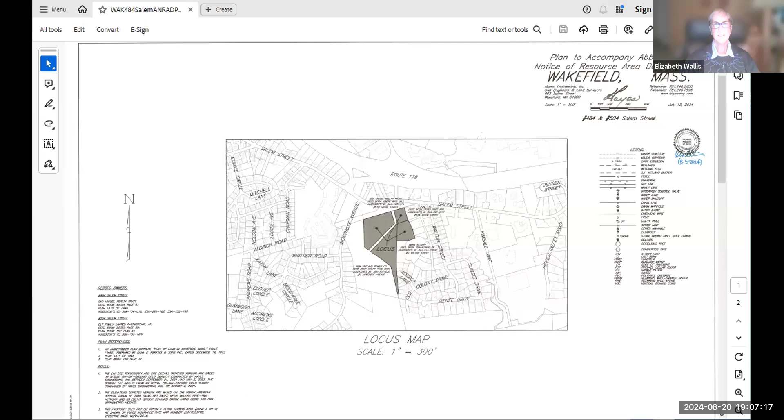And determine that there is no 100-year floodplain on the site. If I may, I can pull up my plan and give you an orientation tour. I think that would be a good idea. Okay, let's see if this works. All right, can everybody see that? Could you make it a little larger? Yep, I will. That's better.

All right, so our locus parcel is directly behind the Dunkin' Donuts at 518 Salem Street. You can see these 4 parcels here. We have 2 developed parcels, one at 484 Salem, and that's this sort of odd shaped one. And then we have this rectangular one, 504 Salem Street. Both have houses and other development on them. We also are including 2 vacant parcels, both noted on the assessors as 0 Salem Street.

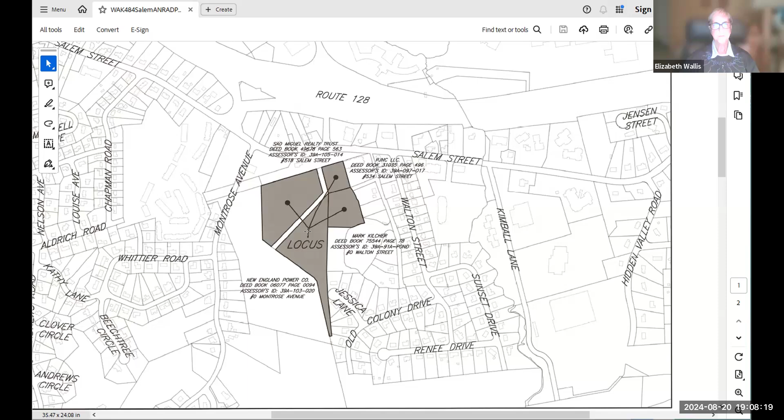As we move on to the actual parcel, so this is our parcel, and let me go out a little bit. So these are the 2 houses I was talking about, and this area over here and this parcel here are the ones known as 0 Salem Street. Getting back to the flags, we have 50 flags on the 2 sites. The 2 lots are combined for this purpose. And the wetland boundary is here in green color.

So you could see that it sort of goes around all the development. I have shown the 50-foot buffer zone in blue here. The entire locus is within the 100-foot buffer, so I chose just to do the 50. We are not within the 100-year floodplain. There are a variety of wetlands and wetland types on this property. We have forested wetlands between 484 and the Dunkin' Donuts fence. This is all wooded. It transitions into an open wetland marsh out here with phragmites along the boundary here. And in parts of the boundary in back of the 484 Salem house seems to be edge of fill. This area has been disturbed quite a bit. We transitioned back into forested wetland in back of these garages.

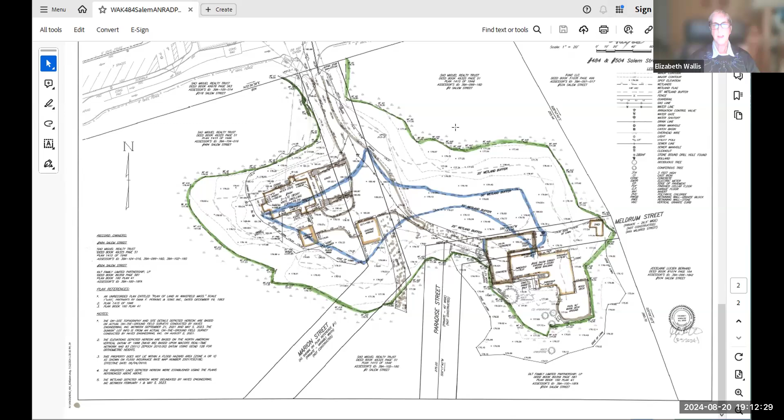We have a variety of grasses and sedges that have come up, so this is open marsh. This is actually a cattail marsh further back from 504. As we go to the right, this is an intermittent stream along the property line, so it's a forested wetland over here and forested wetland on this piece, 0 Salem Street. This area coming into the property is pretty well disturbed. Looks like it was at one time cleared and then regrew. You can see stumps and all.

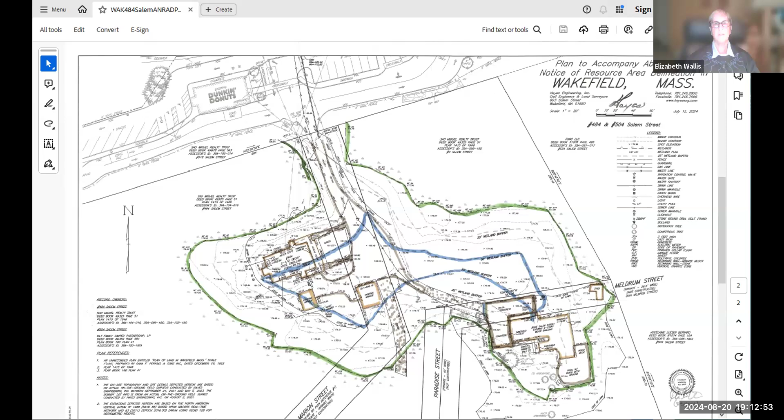Well, I think right off the bat we've got to go look at this. I've been down this road on other occasions. I think we've looked at this property before. My recollection is it's pretty wet out there, but I don't know where that line is in relation to the higher ground. I'm just going by memory.

I definitely think it needs a close look. I do think it's fairly flat, isn't it? There are actually areas where it's been filled and there's a bit of a slope transition, but yes, for the most part, in the back of these houses it's pretty flat.

Does anyone want to add anything to that? Because I'm just thinking there's not too much to talk about with this right now until we take a look at this. What is it that they're hoping to do here?

This is an abbreviated notice of resource area application, and what we're asking you to do is review our flags and hopefully approve them so that we establish that 100-foot buffer zone. We are also asking you to confirm for us that there is no 100-year floodplain.

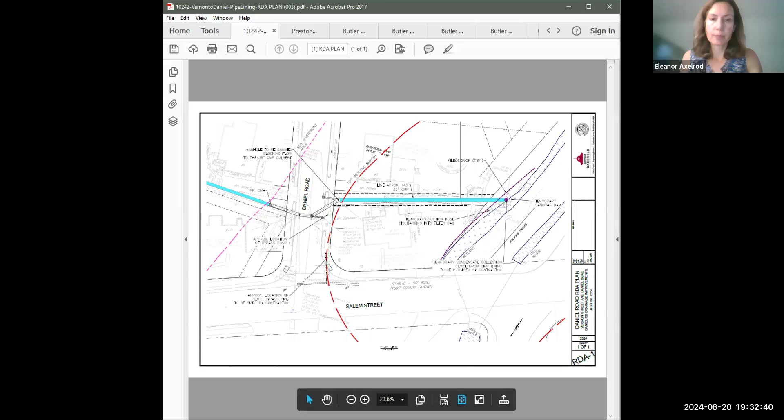Okay, so we need to move that - that would be a negative determination. Okay, I'll move that, need a second. Second. Okay, all in favor? Roll call for this.

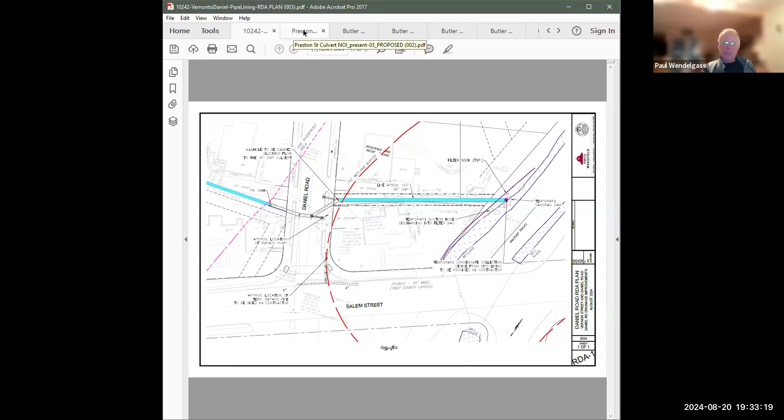Haley, yes. Paul, yes. Eleanor, yes. And I guess I'm a yes as well. Okay, alright, so that one's done.

One last question - when are you looking to start, Bill? We'll be bidding this, so I'm thinking this may end up being a late fall project. If not, it would be spring next year, somewhere in that time frame. But if there's any time restriction that you want us to work in, we're happy to do that.

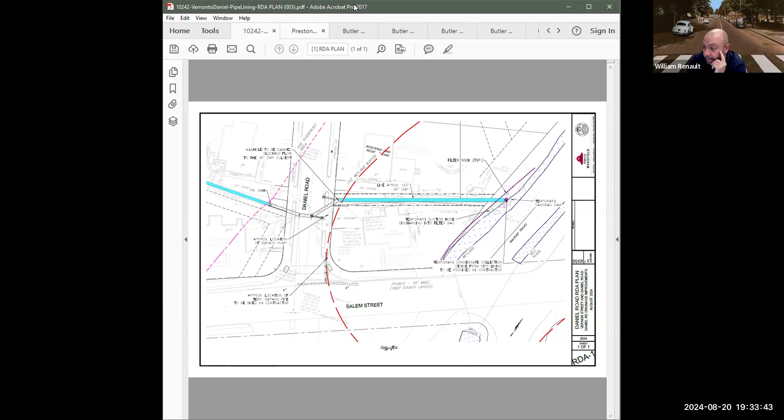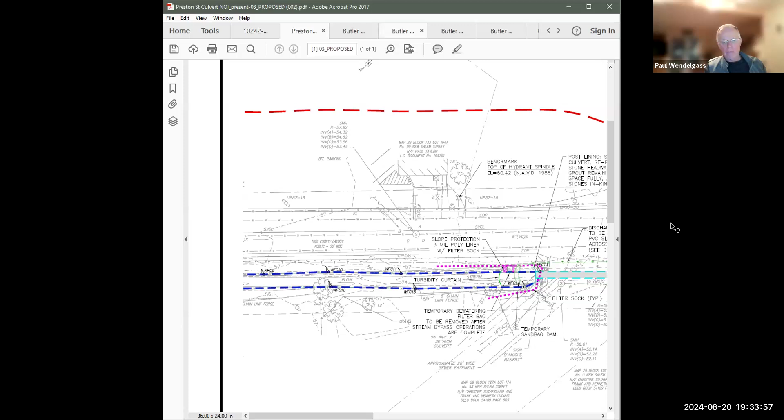All right, so the next one is Preston and New Salem Street. Let me jump in on that. You folks may recall, going back a few years - you can still see the screen, I hope, right? I just moved it on my computer, I wasn't sure if you could see it.

So downstream of this area is the New Salem Street culvert that you folks approved - I want to say that was around 2008 or 2009, right around that time frame. It did incorporate this Preston Street culvert. The original proposal was a slip line project through here, which would have reduced the opening significantly and grouted in, to have a much smaller pipe through this area.

We ended up with some issues needing ground supports installed for the larger culvert downstream. That was a budget constraint for me, so we weren't able to get this part of the job done. We bid it as an additive alternative, a separate part of the project that we can either award or not award.

So the project now is we're coming back in a similar situation. We've gone through and reevaluated the condition. We can clean and line this one as well, and it's something we'd like to move forward with. This is a little more involved. Besides coming here, we're also going to need an Army Corps of Engineers permit to do the work to bypass the stream.

Our proposal is to sandbag up the upstream side. We would install a pump system to bypass the stream down by the culvert and then discharge downstream of another sandbag system. On the interior, we would have to do some dewatering, which would be pumped as well. And we have basically a filter sock.

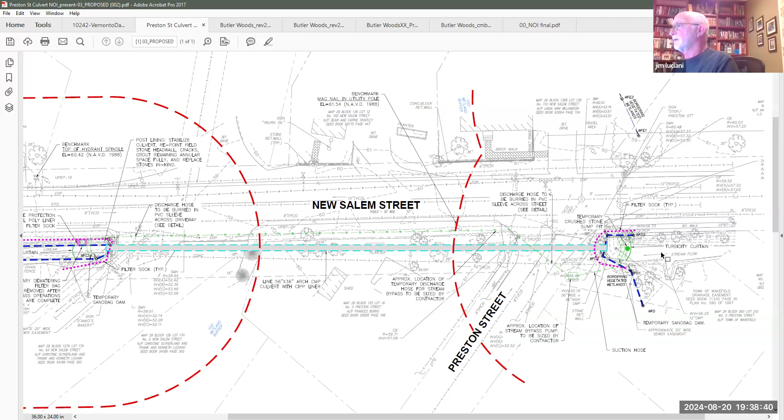If you look at what you put for direction of stream flow - the stream is flowing, and it seems like the labels show it going right to left toward each other, which is a little confusing. I think the labels are the problem. This stream is going this way, this little sign.

This is for the turbidity curtain downstream that we had put in, so the arrow is only pointing to the turbidity curtain, not the direction of flow. You can't see the arrow because the turbidity curtain label is over it, so it's a little confusing. I noted that as I was prepping for the meeting, so I didn't catch that when staff was designing it.

So the water is flowing right to left. Sorry, what is the turbidity curtain? It was included within the plan set.

It's what I'd call like a floating, almost like a pool noodle that sits on top. It's a curtain that flows and basically goes down to the stream bottom and is held there by a chain. So as we're discharging, between the cofferdam and the turbidity curtain it can collect anything stirring up that's not being picked up by the filter bag.

So we do that typically - anything we're doing in a stream, we'll always use a turbidity curtain. We use this same configuration within the previous permit that was approved, and on the downstream culvert as well. They work pretty well. It's kind of like a belt and suspenders, if you want to think of it that way.

My second question is, will this make drainage in that entire area run better than it does now? That area suffers from a lot of level topography and backup. Will this help? Yeah, it definitely does.

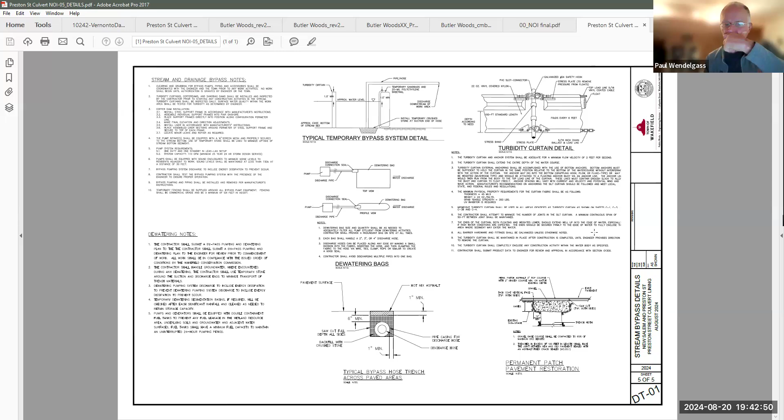Unfortunately, for us to fix the drainage out there, it is a situation where you would be dredging the river pretty much to the town line. So this is a situation where we have holes in the pipe and we need to make sure it doesn't collapse, so that's what we're doing here. It's more of a maintenance of the existing condition. We've opened up the pipe further down to get some additional flow through. That has happened, but how much of an appreciable flow that would be, that's a tough one to answer.

This was all identified as part of a town-wide study that was done prior to me being here, in 2006, and that advanced this whole project prior to me being here. So I kind of took this on as we had a staff member that left, and then it came into the engineering group to manage the construction and final design of everything. But all of the pre-work and design stuff was all done prior to me. So yeah, tough for me to answer that.

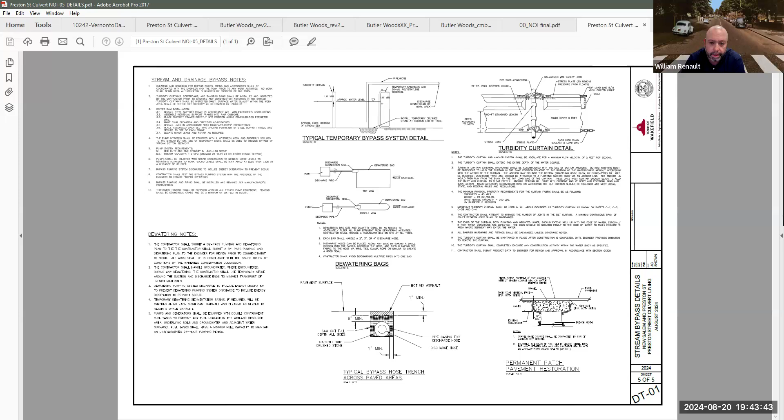So can you see the plan of the detail plan here? Yeah, I can. I have one question I want to ask you. Sure. As part of the project, can we have you clean some of the stream on the upstream side of the brook?

Clean out the brush that's obstructing the flow of water in that area, at least 50 feet in, unless you hit some real big stuff. If you want to condition it and the limits we can work out with Elaine, I'm happy to do that. Yeah, we could do that, because we should take the advantage of cleaning that area while we're in there.

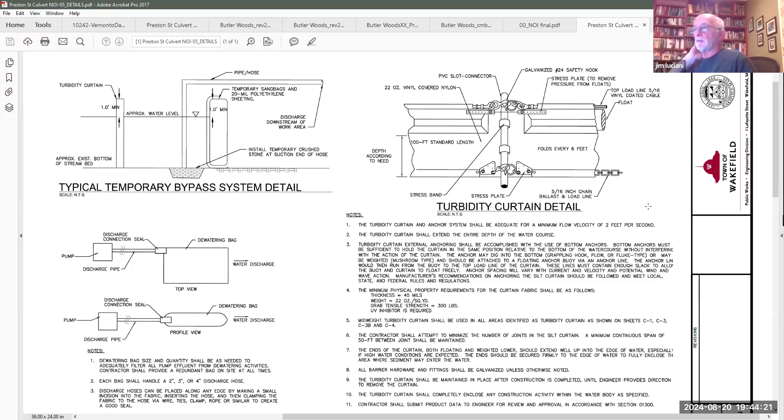I would think so. So this kind of shows how the turbidity curtain works. Each section of it is connected through a PVC slot. There's this little vinyl coated cable and float that sits to the top of it, and then you have these kind of chains to keep it together so the water can flow through. This is all kind of a mesh, so water's going through. Ideally, sediment is being trapped behind it. So if there's any turbidity being discharged outside of that filter bag, it would be caught here and not continue downstream and all the way down through the river. That's the idea why we do these.

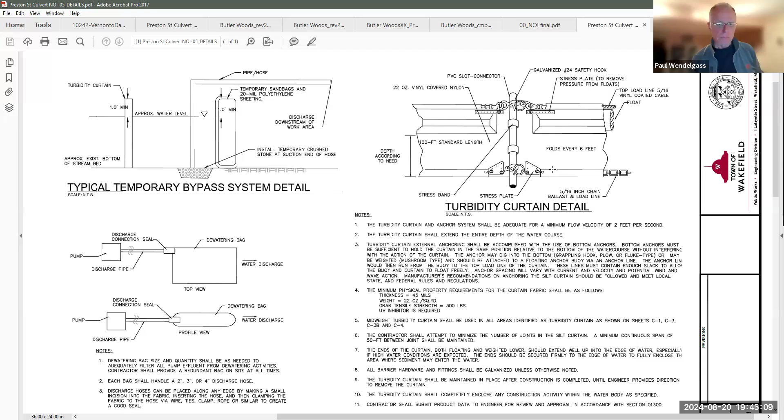And this was included in the original NOI with detail. So that's, and you see the chain on the bottom, that's what keeps it tight to the bottom so that it doesn't get bypassed.

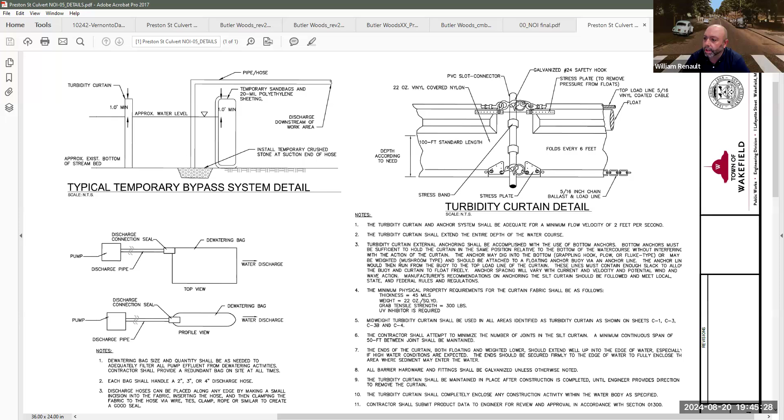So we did receive a few comments from the DEP. I don't know if you folks had a chance to look through that. I can run through those answers quick. I think I've probably covered most of them.

So the site plans are not adequate for review and should be revised. Well, I think we've just done a review, so I would disagree with that comment.

Wetland boundaries greater than 3 years old should be redelineated or refreshed. Elaine, I believe you went out there to take a look at this stuff too. Realistically, it's a pretty steep embankment that goes down, so you're not going to see wetland creep where it's going to go beyond over time. It's pretty much the river level, it doesn't really change from that.

So we were using the same flags from before. Obviously we just didn't finish the project, so we're just going to come up there to do this piece.

We should be showing bank delineation and that type of stuff. Those are essentially at the wetland flag. Elaine, if you want to chime in on that, but we've used this delineation for a couple of different projects. There was another one that was done where there was some discharge coming from across the street that kind of dovetailed and used some of our erosion controls. So I think we've looked at this area pretty extensively through different projects, but I'll leave that to Elaine.

Project narratives and plans should be provided to describe how wetland resource areas will be restored in kind. We just talked about that with some of the veg and stuff that we're going to be removing and cleaning up.

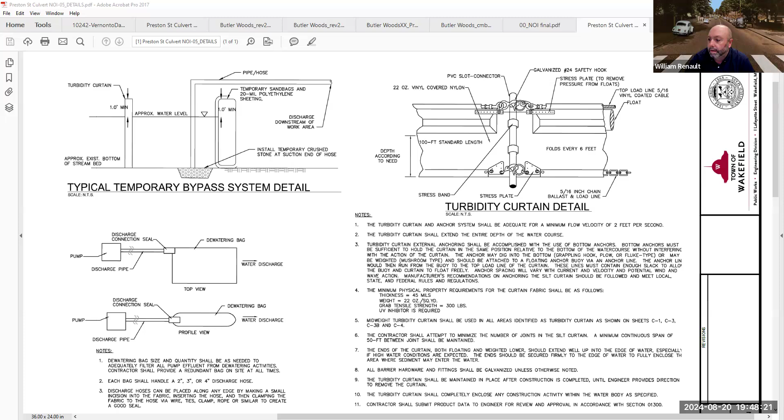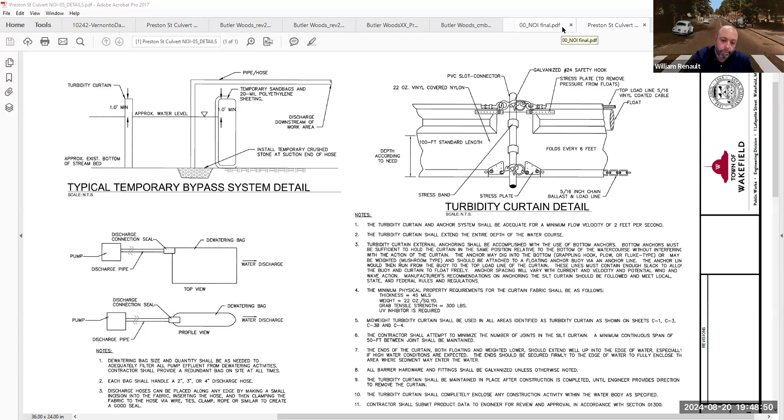This has a lining to it as well, yeah. So with the stream bed, it's a little bit different than the pipes we had before - I'm cleaning just a little bit of sediment in the bottom. When we get to these situations, obviously there's a lot more material that's there that gets moved from the stream, so we have a little bit more cleaning to do than typical. As we're pulling that material through the pipe, when it gets to the end, they're still working within that cofferdam dewatered area, and they remove that material and restore it back to the way it was previously. And again, if you want it to extend, then we extend.

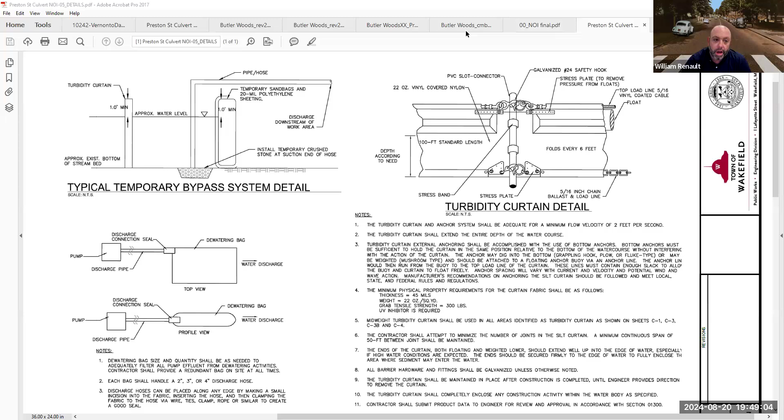You mentioned stream crossing standards, which you say you complied with. But we can't comply, it's just not possible. If you look at the way to meet the stream crossing standards for a run of this extent, this would need to be probably 4 times the width of Salem Street to meet your stream crossing standards because of the length of it. So it's just not practical based on the configuration of the site.

Okay, but what I was thinking about was, it says all culverts should be embedded, sunk into the stream, a minimum of 2 feet - in round pipe culverts, at least 25%. So, are you going to do the same thing?

You're gonna take the sediment out of the bottom to line it and then put the sediment back in? Now, putting the sediment back in this type of situation is pretty difficult because of the configuration. Smaller pipes, I wouldn't have a problem doing it, but I can't get folks in there to do it. So realistically, because it's a lining project, I don't have that ability. I'm typically happy to do those things, but in this case we're trying to save the town a ton of money by lining it, as opposed to going to town asking for a bond for $500,000 to replace this culvert. And keep in mind, I'd have to go through all this private property with the shed, the house, the fences, and all the stuff through here, wiping out a bunch of trees on top of the culvert too. So I'm just trying not to do all of that, to minimize how invasive it'll be.

Is this liner the same type of material as the other one? Yeah, it would be the same. I'm going to bid both of these together.

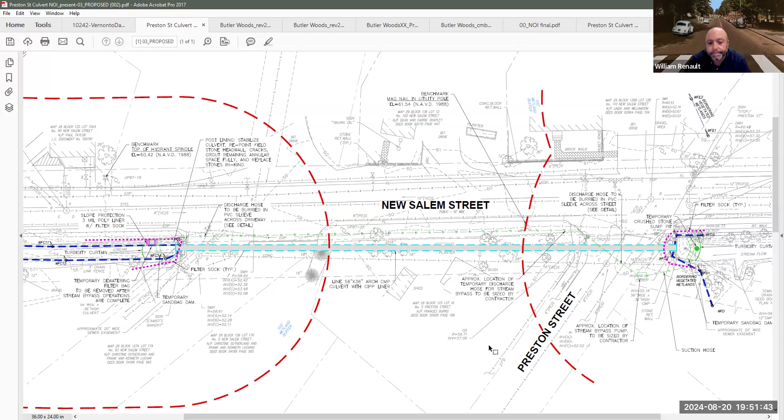Okay, next time Bill, if you could put down top of bank and bottom of bank - we should have that on these plans. It is a resource and should be identified. Yeah, I'm comfortable doing that going forward.

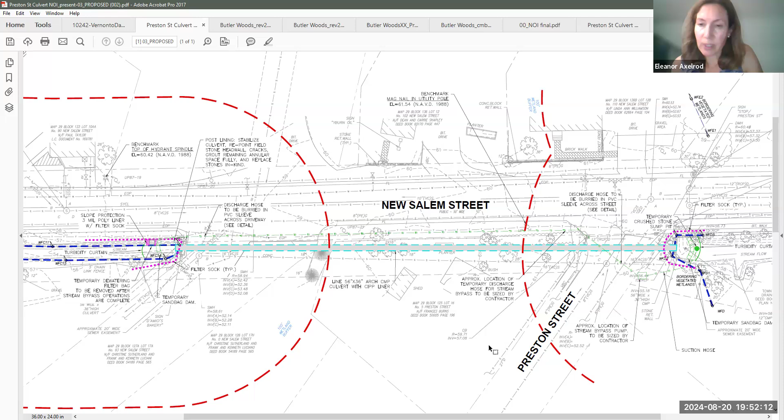Okay, if we want to do a site walk, I have no problem with that, if that's what the commission wants to do. You want to just do it the same day to make it easy, since it's down the street? It won't take long.

You're gonna bring some boots. Is there any water in the stream now? Oh yeah, so bring some boots because you have to get down to actually see inside. If you're gonna try to get down there, it's gonna be a challenge, it's pretty steep. Well, from the 93 side, New Salem Street, you might be able to have a better chance. I don't know what the other side looks like.

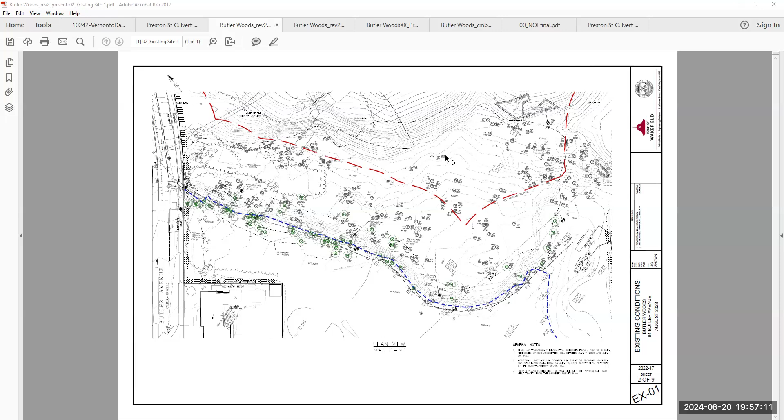So we've been talking with the DEP for a long time. That was probably one of the first things I did when I got here in 2008. As part of that first initial conversation, we talked to them about what we had to do in this area. Jim, I think you were with me at the time in that meeting at the Wilmington DEP office, where the DEP agreed that we could go and cap this rather than removing it, as long as we were to make this restricted for passive recreation.

So the proposal here would keep this area basically running right along that ledge line as a new passive recreation area. Going to our next plan, this kind of shows what we would be looking to do. We'd be looking to regrade the slopes at about a 2-to-1 slope that goes down to the wetland area. We'd be looking to put a new 18-inch cap on top of the whole entire site. Portions of this would be regraded so that we'd be able to get a gravel path that would go down.

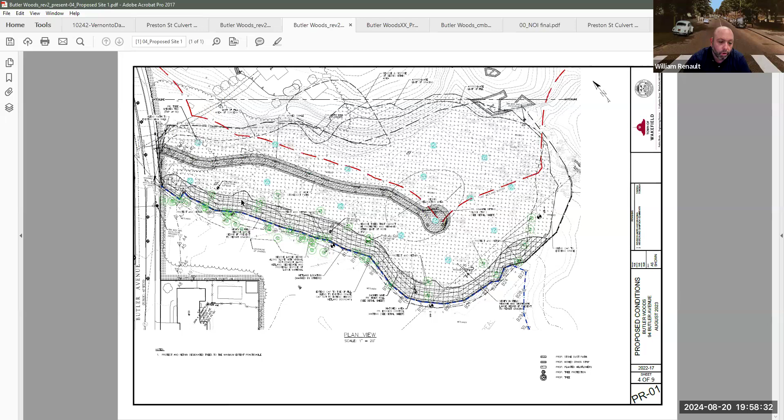So the gravel path comes down to a little sitting area here. We would have a few granite benches for folks. Our goal, after some of the site walks that I've had with Elaine and with Jimmy, is to look at trees that we can salvage.

So these trees, the green trees with the circles, are trees that we've identified as possible salvages. There's a couple that may be on the edge of the slope that we have to determine if the debris has impacted it too much or not. But this would be the area that we would try to save trees. The light cyan, this light blue color, would be new trees that we'd be planting within the cap as well. So we have a kind of specialized overlapping of the fabric and cap to make that work for the tree areas. We would propose to do that as replacement trees.

And then we would be looking for the majority of this to be seeded as a wildflower mix, so this would be more of a meadow type look through this area. That was something that Rebecca and I were talking about way back when we started initiating this project, discussing what we'd want to see out here for a final end product.

Looking at the topo and what we're looking for, kind of cuts, fills, and that type of thing - these red areas are areas we have to peel back. If you think about it, we have a 2-to-1 slope that's going right down to the wetland line. For us to cap that with 18 inches on top would impact the wetlands, and obviously we don't want to do that. So we need to peel back 18 inches of material so we can put the cap back on top of it.

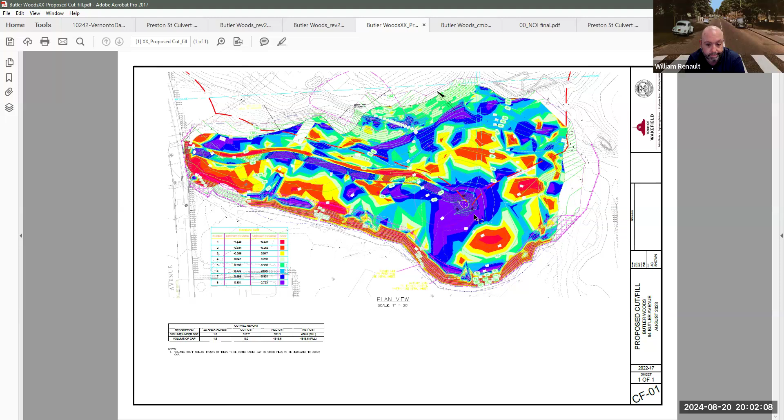So I think that's it in a nutshell. I know I'm going fast, but I think that covers it. Just to give you an idea of what the cap looks like, if I zip through here.

This shows a good example of what the slope looks like. You see you have the large debris coming through, and then we have these clumps of things, and it steepens up and does all of this. So what we're doing is peeling back debris, getting rid of these types of humps and things.

We're not touching any place past the silt fence that's there, so that would be edge of wetland and what we're using, and we're going to hold that as our limit of work.

Any trees that are down in this lower area—there's a couple of them where it flattens out behind it that we can salvage. We're going to salvage those to the best of our ability, as long as they're not damaged based on what was placed. Keep in mind, a lot of these were existing trees that would have been in the old wetland, and they've had debris basically thrown right on top of them.

Anybody that's in good shape, we identified those, and we would keep those trees, especially near the wetland area, to provide the shade over the wetland area.

We'd have some erosion control matting so that this stuff doesn't move on us. This shows the layout of our little path—stone dust walking path, pretty flat for the most part, so we're not expecting a lot of drainage issues. We'd have a little swale to the side of it for the hill coming down, so anything that's coming would get caught by the swale and gently overflow into the wetland as it does today.

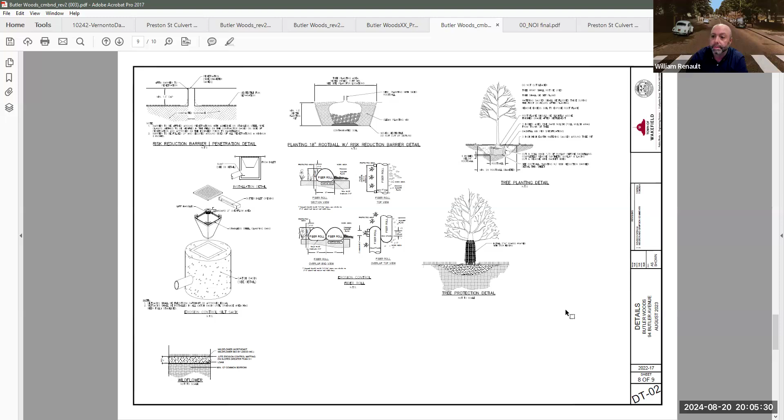And the wildflower mix you're talking about would be native? Yeah, New England wildflower mix, similar to what we used up at that hill. There's a native one we can use, and a few other ones that are even a little more prescriptive. I think the folks at Cabot and Forbes had a pretty aggressive mix blend. We're happy to have the mix blend reviewed by you folks too, to make sure everything's native, but it's all a Northeast wildflower mix. So that was the goal, to keep it all native.

Bill, with this system of capping, what is the final use of the property? What are we going to be able to do as far as that goes?

It's basically open space, and it would be in your folks' care. We'd have either a subdivision where I'd divide this as a separate lot, or I may do it as just a restriction — we're figuring that out. I'd like to work through that in this process to some degree.

The only thing is that some of the stuff on the top — to offset some of the cost for taxpayers and whatnot — we're looking at maybe a small affordable housing development type look. That's one of the things the council has been asking me to evaluate.

As the ADA coordinator for the town, I talk a lot with the Disability Commission, and they'd like to see some disability housing there too. So we're trying to meld those two asks into a pretty small development — thinking small cottage type things closer to the neighborhood, not like a garden style apartment. That's not what we're looking at.

So that's all outside of the buffer zone and outside of this project. Well, so I guess I'm back to where you're putting this cap — what kind of use does that entitle you to? Like, if you're going to put houses up there, are kids going to be coming down there trying to play?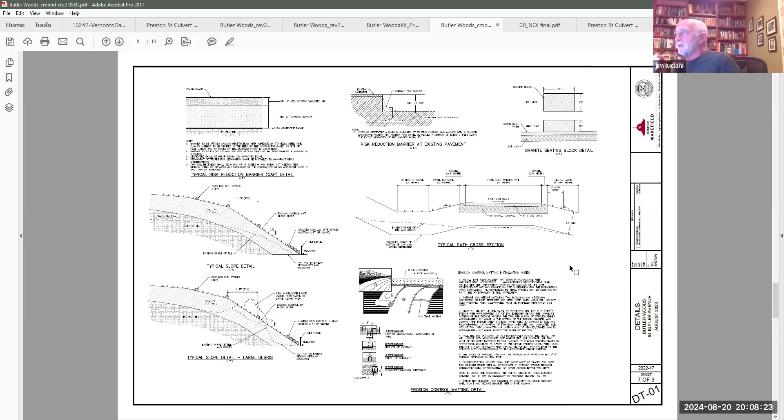So I know your part will be fine. I think it's just human nature to gravitate to areas like that. Well, I think all that stuff is in the restriction too, right?

So as we're writing the restriction and finalize that, we would have all that detailed out, that it has to stay as passive, this stays as a meadow, a wildlife corridor, whatever you want to call it. So it's there and it's in the documents for the property and it can't be changed.

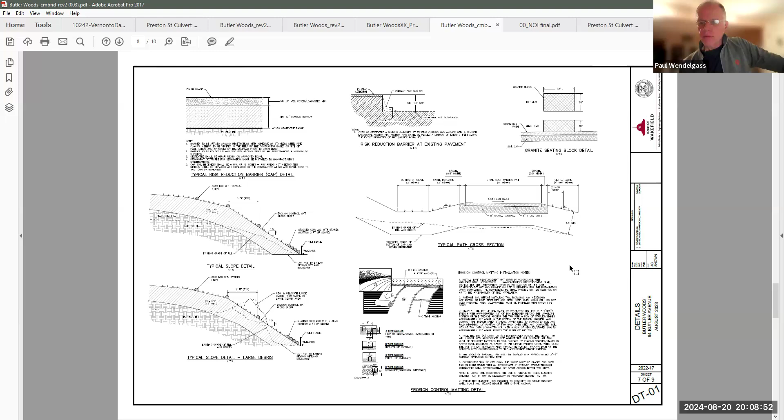So it won't be mowed, Bill, is that correct? The intent is not to mow. Similar to what we do at the hill, we're not really mowing those down. I mean, they're perennials, so they should be coming back. It's just making sure that the junky stuff that's getting in there is weeded out, so the natural stuff can take over, and then the natural stuff will stop everything else from coming in. So there's a maintenance component to it, no doubt.

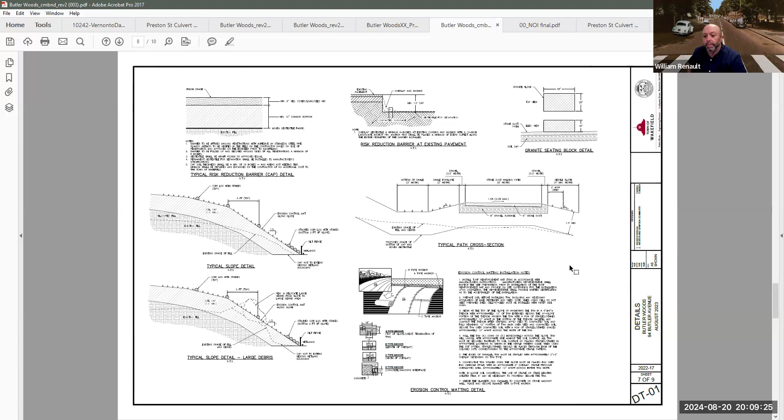We're thinking we can get it done through 3 seasons. That's typically what we would condition here anyway - we typically look at a 3-year horizon for the maintenance of those types of things. So we would do that same approach here.

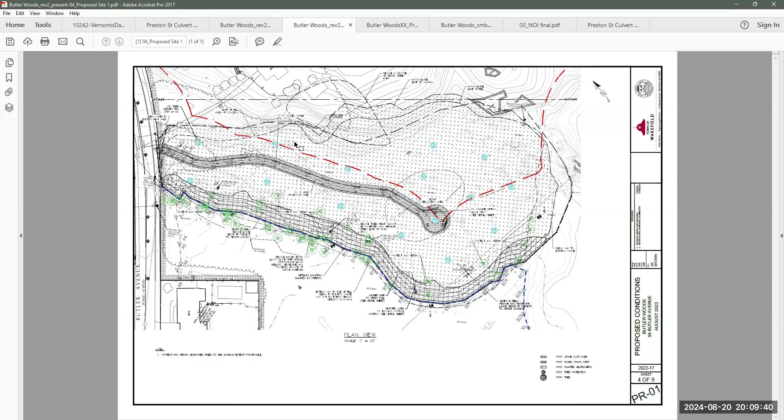Can we go back to the other map for a second? Can you point kind of in relation to what we're talking about where you're saying this possible development would be? So see the house up the top here? It's up on the top of this hill, so it's kind of up in this area.

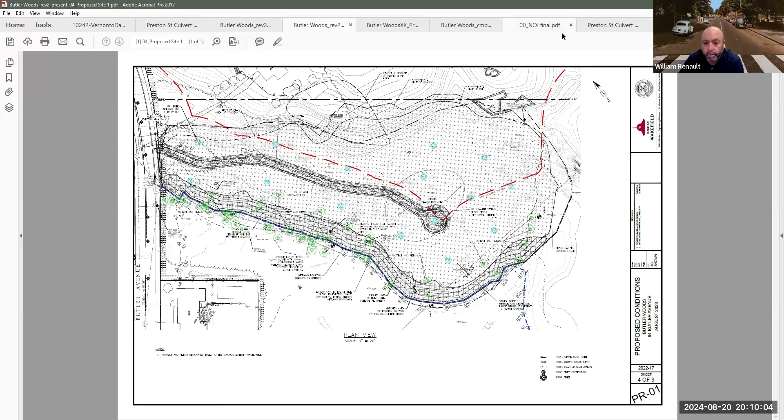So I'm thinking somewhere the line in the - I gave you a plan that showed kind of a proposed line in the initial NOI filing with you. That shows what I would expect that to look like. I can probably find that quickly if you want me to show you what I was thinking. So this is kind of a shot of the debris that we were talking about, and I just put the back here, what we were thinking.

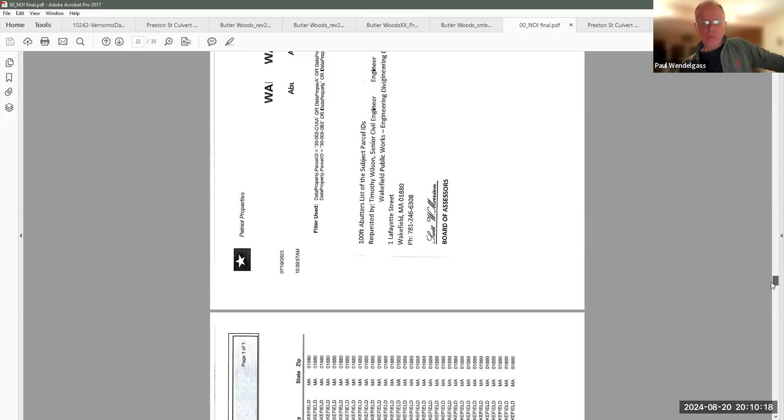What's the name here? Tim, do you remember where you put that, from like 4 years ago or 2 years ago when you did that map for the subdivision? Not the subdivision, but at least like what would be the restriction area? If you go to the revised NOI plans, I do have one of the plans that does show the top of the hill. No, but we included a map that showed... let me look real quick, I'm looking for it, Tim. But we showed kind of what we thought would be the restriction area.

Essentially, what I'm doing is kind of going through the middle of the ledge area for the location. If you want me to share my screen, I can show you that map. You get it? All right, yeah, let me stop sharing. Your turn, you're on.

Yeah, so here we go, this is the thought. So the parcel, this gives you the overall parcel, development area, probably somewhere in this. We have a big gully that goes through. There's some other wetlands in the back that would come in as a separate filing in the future. And we're thinking this whole section would be either conservation restriction area or subdivision in a lot.

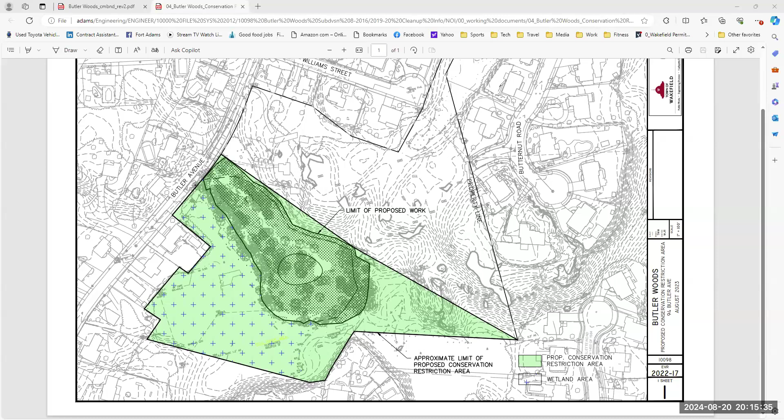Bill, can I just ask you about the conservation restriction? Is that going to be a deed restriction or is it going to be an actual state conservation restriction? It would either be a state conservation restriction or it would be a separate parcel that we subdivide and give you. Okay, thank you, it's one of the two.

It depends on what we finalize on the top, that's how I would probably determine which one, because I may need a little bit of additional frontage depending on what I end up doing at the top. That's basically the only reason we would change it.

So the thought, when this was purchased at town meeting, was discussed that the upper section would be a potential smaller scale development, but again, small scale. That would help offset cost here for the cleanup work that we have to do.

And so that would have been a fall 2020 town meeting, I think, when all that was discussed. We purchased the property in January of '21. So it would have been November or so of that fall town meeting that all of this would have been discussed, the restriction, and then the development at the top.

I guess, Bill, I was concerned on the unshaded side. Are you guys doing work there at the time that would kind of change sort of drainage and flow and things coming into this capped area? Are there any kind of restrictions on that? Like you can't, I don't know, dewater onto a capped site like this or something? Are there any restrictions?

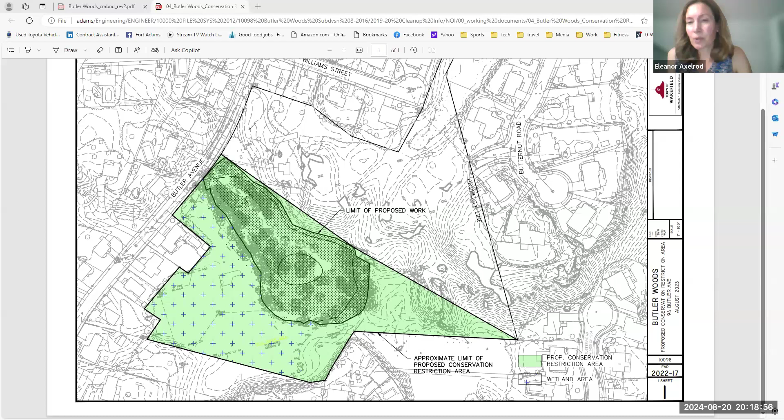Yeah, we'll build the trail. So even though it's gravel, as long as it's maintained, it's considered an acceptable surface. It's like a stone dust or tight gravel, but we have to maintain it.

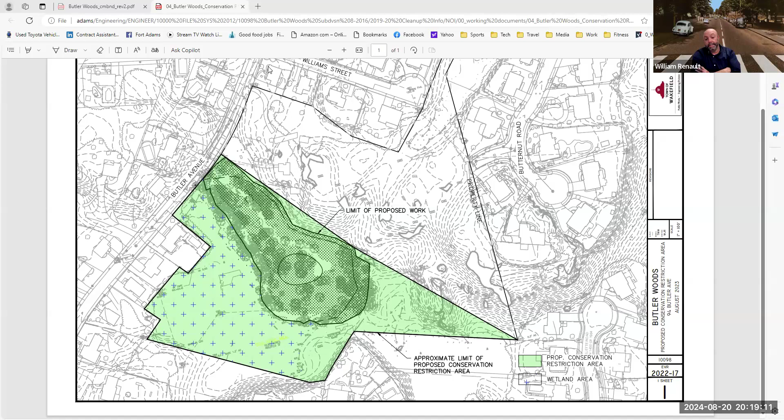The point about the sidewalks and the widths, that's a good point. Typically what we do, obviously as the disability coordinator, I look at this on all of the streets that we pave. So that's when we're looking at making these accessible. Right now, the public rights of way accessibility guidelines have a requirement for a 4-foot wide accessible route, what they're calling the pedestrian access route, the PAR.

So it can be 4 feet wide for the majority of it, pinched down to 3 in small sections, but every 200 feet has to have a 5-foot wide turnaround. That's the requirement. So we look at all of these things as we're paving, and that would be something I'd have to look at when I come in to do Butler Ave.

Where at this point the condition of Butler Ave really isn't bad, so we wouldn't be looking to pave this. I think we had on the plan some patching related stuff, but that wouldn't trigger the full ADA upgrades. So we wouldn't be doing that, but it's a good point, and we look at it in every street that we pave, and we run into it in sections.

One of the ways we get around it is we use the driveway aprons as that, so we make them the sidewalk, a little bit farther there in those areas. We can cheat the curb a little bit, but that's how we make it happen.

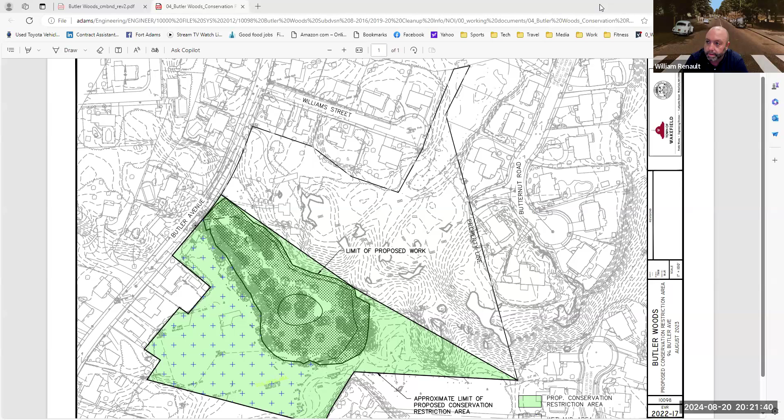The Floral Way is graded for ADA, so that's why the grade changes. If you look along the edge where the fence is, that's why there's some elevation differences, so that we could get the grading right. The maintenance is the thing, and it's on the schedule for this fall, I believe, to be brushed up and fixed.

Are you going to be adding vegetation? I was going to say, additionally for that path, we are looking to include a small swale along the uphill side, just to help with some of that runoff and keep it from washing over the path. I'm not sure if you can see, I have the detail right here. I'm not sure if it's showing up or if it's the old one, but there's a little swale.

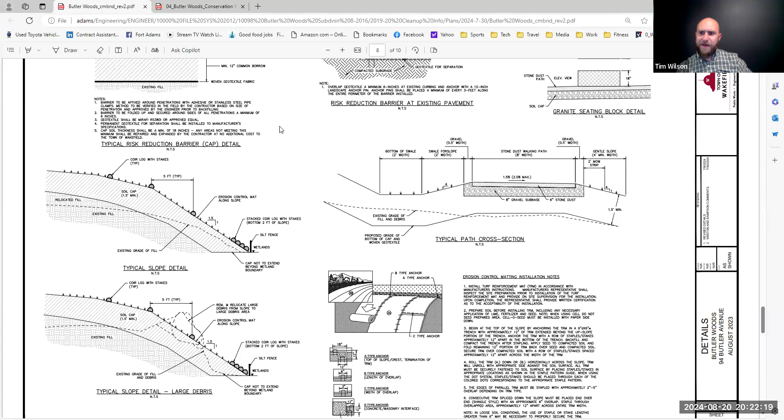Where's that going to drain to, Tim? So it basically will be taken to the end of the path and then allowed to kind of spread out over the hill that it would be going down anyway.

Yeah, so that's what we have, I think, in a nutshell. Any other questions, folks? Does anyone else have a question?

You don't have a contractor selected for any of this work yet? At this point, we don't know.

I need to get this approval, and then at that point, if I'm locked in on the scope, I can move forward with the contractor. So it's not the licensed site professional who does the work? No, he oversees it.

We also need to have an air quality monitor. There's a whole slew of professionals besides myself involved in this. You hire them and he oversees certain aspects of it. There's reports that go to DEP about the management of the debris, the development of the cap, the air monitoring—all done through different folks working together.

To make that consistent with what we propose in our final plan, the final plan doesn't get submitted to DEP until we have you folks on board with the approach.